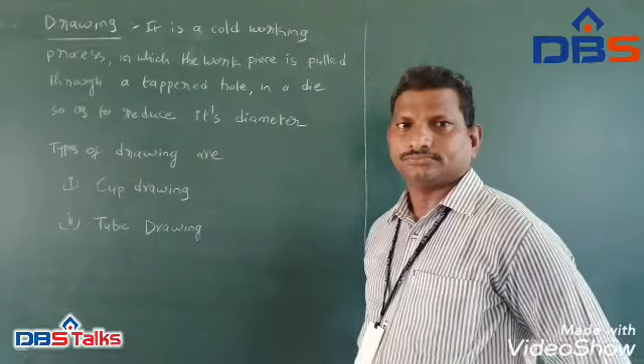Let us discuss the process drawing. Drawing is also one of the sheet metal working processes which we may do on sheet metals. So what is meant by drawing? It is a cold working process in which the workpiece is pulled through a die. This die will have one hole, and through this hole the workpiece is pulled so as to reduce its diameter.

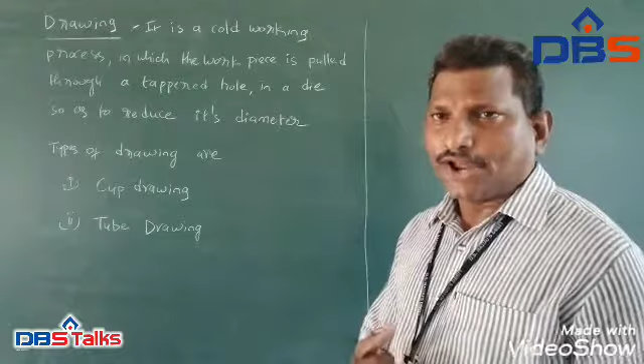Drawing is a cold working process. How can we say it's a cold working process? When we do the sheet metal work on the sheet at a temperature lesser than the recrystallization temperature, that process is called a cold working process. Here we are carrying out this drawing process at a temperature lesser than the recrystallization temperature. That is why we are calling it a cold working process.

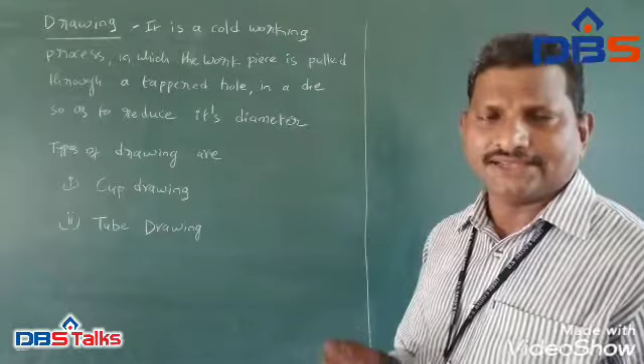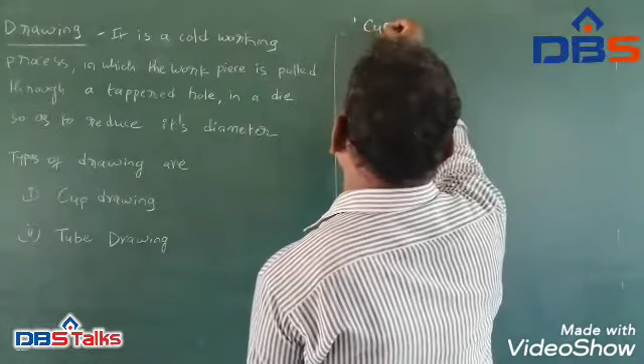So in this drawing process, what is the main aim? We have to produce devices like cups and tubes. If the drawing process is used to produce cups, it is called cup drawing. And if the drawing process is used to produce tubes, it is called tube drawing. Let us discuss the mechanism present in cup drawing. Cup drawing. In this cup drawing method, the devices we need are punch, die setup, and sheet metal.

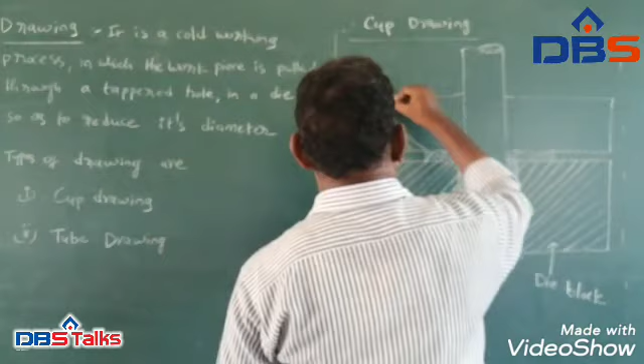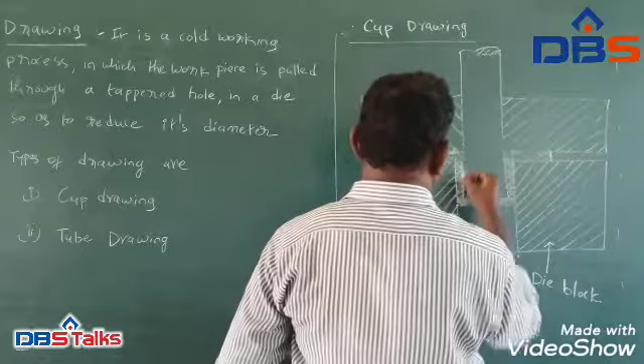We are drawing the hatching section of the die block. This is called the die block. And now we are drawing the hatching section of the punch hole. This is the sheet metal. Punch. Okay.

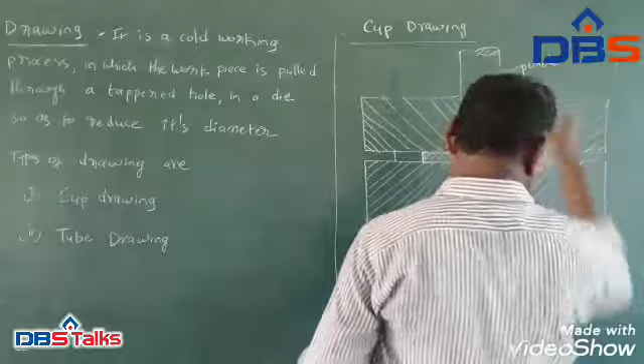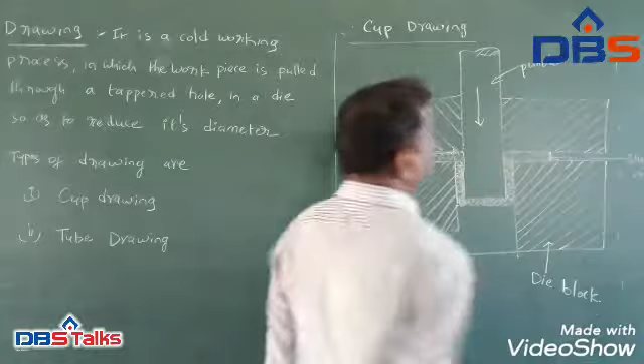You are seeing a schematic diagram for the cup drawing process. What are the devices which may be used in the cup drawing process? Die block, punch, and stock or sheet metal. See, what is the shape of this die hole? This is just like a cup. So before producing this cup, first we will place the flat sheet metal on this die block and put the punch holder upon it.

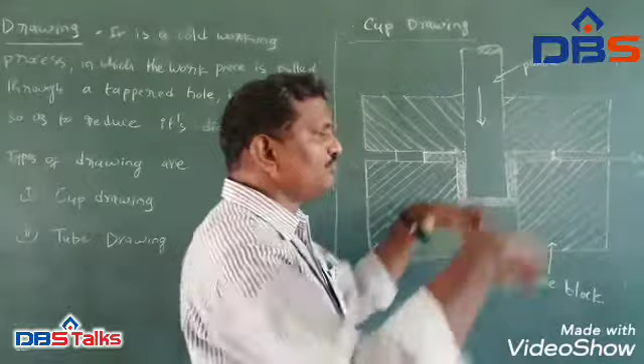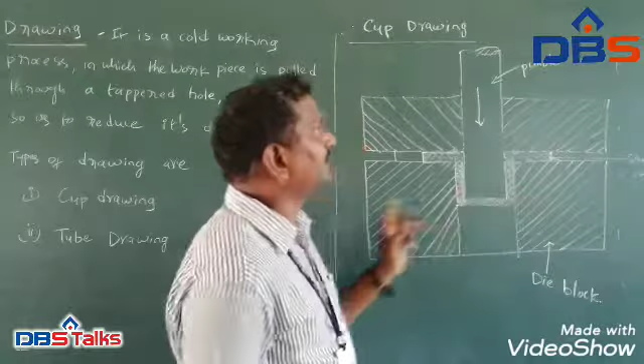Then we will allow the punch to fall down into the die block hole of required size. Because of the force acting upon the sheet metal, this flat sheet will turn into a cup-shaped object. After producing this cup, the punch will be moved up and we will collect the produced cup. By this, we produce the cups. Since the cup is produced by the method of drawing, we call it the cup drawing method.

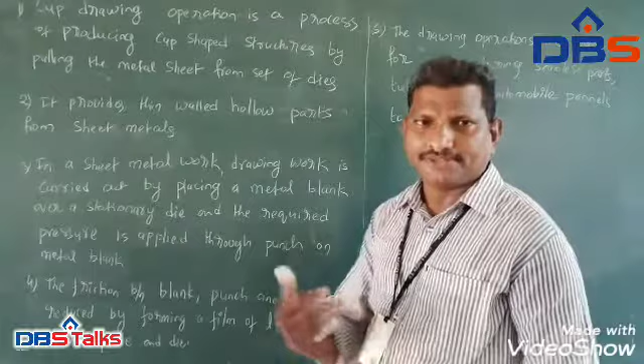Let us discuss the main points in the cup drawing process. The cup drawing operation is a process of producing a cup by using a die, punch and a blank. What is meant by blank? Blank is the input sheet or input material which is meant for producing the cups. This is taken from the sheet metal. So, what are the procedural steps involved in producing the cups?

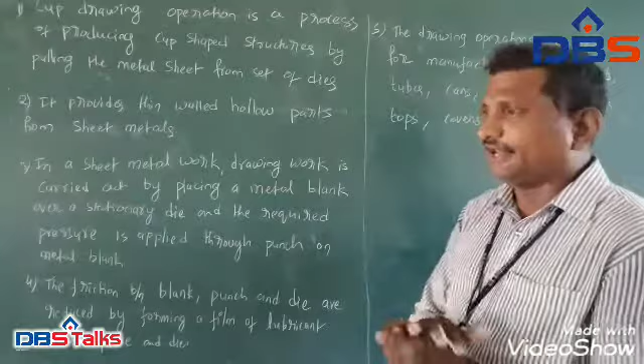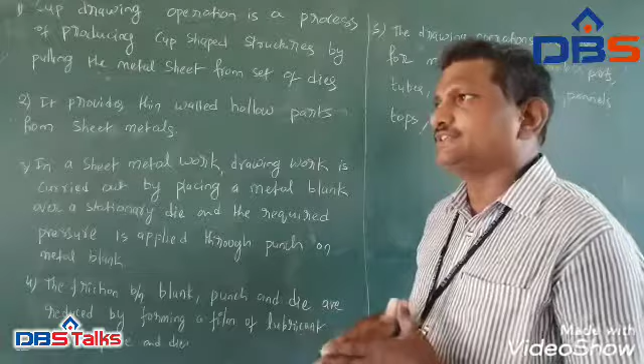First the input material or blank is placed between the stationary die and punch. The stationary die rests on the ground and the punch rests on the blank; there is a hole or cup-shaped cavity in the stationary die. Once the punch is allowed to fall on the blank, which passes through that hole, a pressure or force is exerted on the blank. Because of this force, a cup-shaped object is produced.

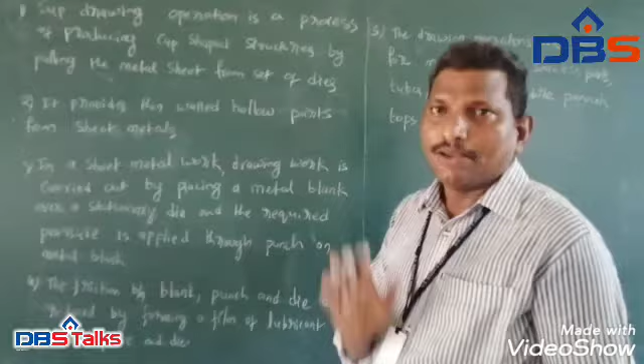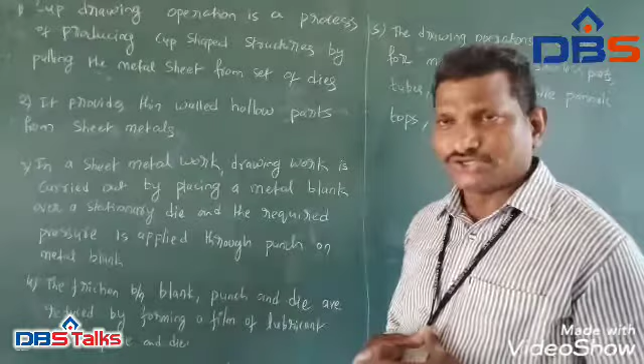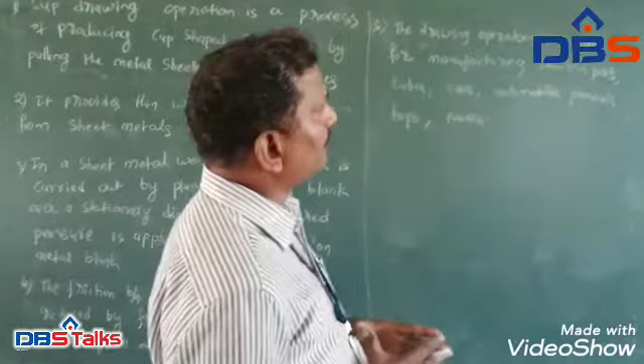In this mechanism, friction exists. So, to reduce the friction, we apply a thin lubricant film between the three contact surfaces. By using this cup drawing operation, we can produce thin-walled cups. Drawing operations are also used to produce seamless pots, seamless tubes, automobile covers, and automobile tops.

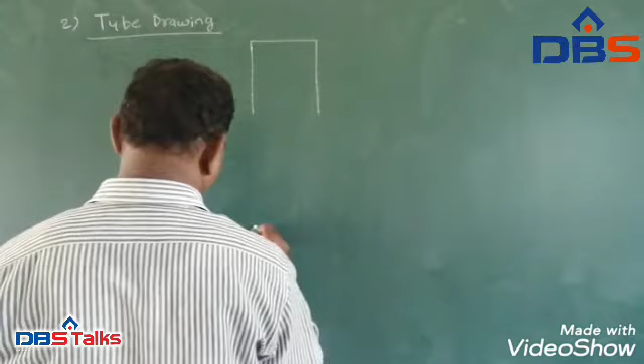Let us discuss the tube drawing process. Tube drawing. By seeing this title, we can understand this method is used to produce tubes by the drawing sheet metal work process. The devices we need are one vertical die with a hole.

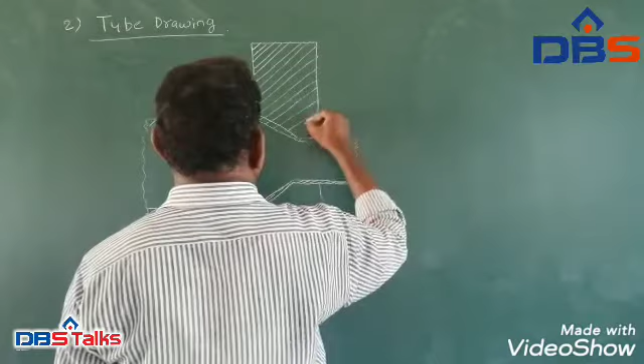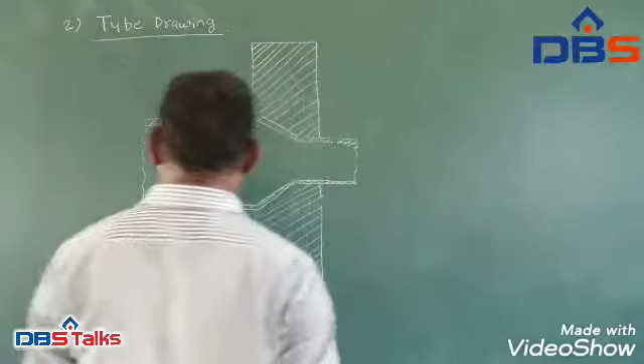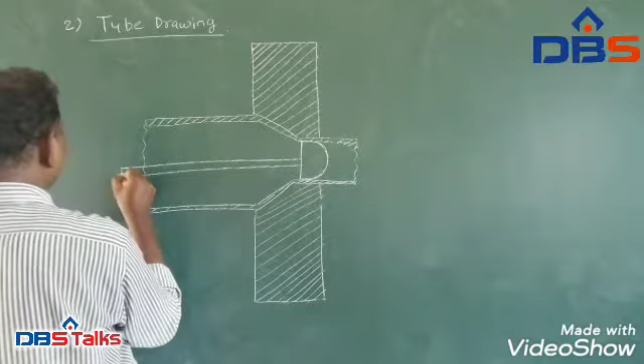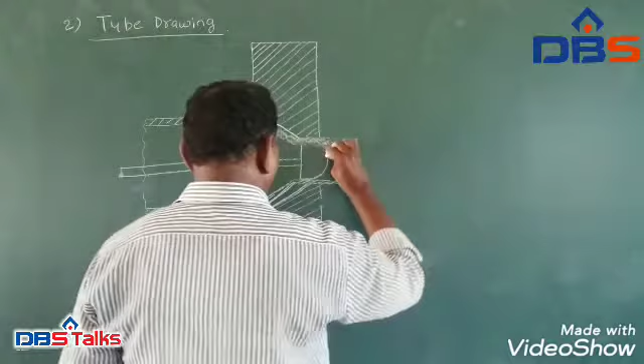We are drawing the hatching section of the vertical die, having a small opening of reduced diameter. Now I am drawing the mandrel. This mandrel has a diameter approximately equal to the required diameter of the produced tubes. Here there is a tapered section provided for smooth flow of the blank.

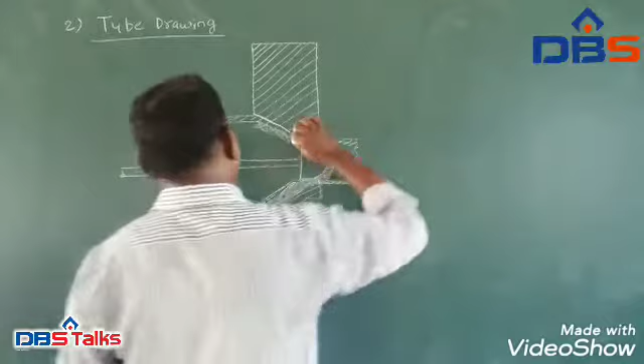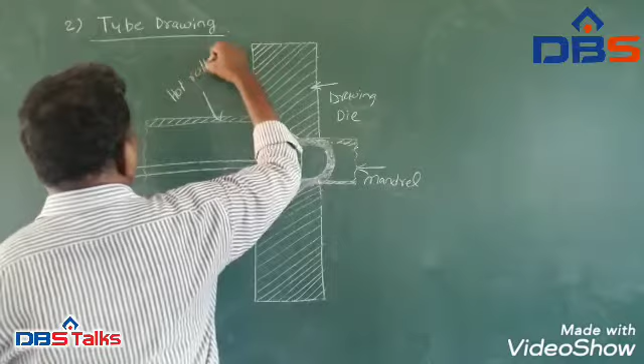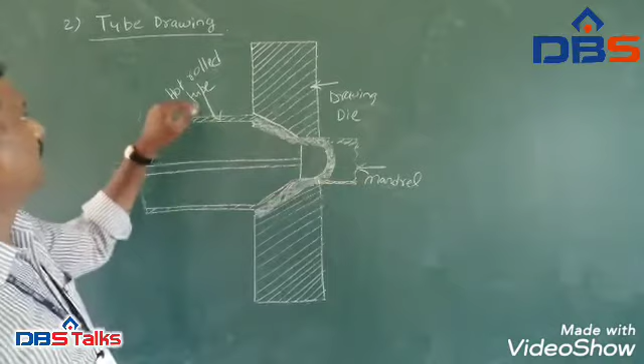This is the drawing die, this is the mandrel, and this is the hot rolled tube. You have seen a simple schematic diagram which represents the combination of drawing by mandrel and hot rolled tube, which is used to produce tubes.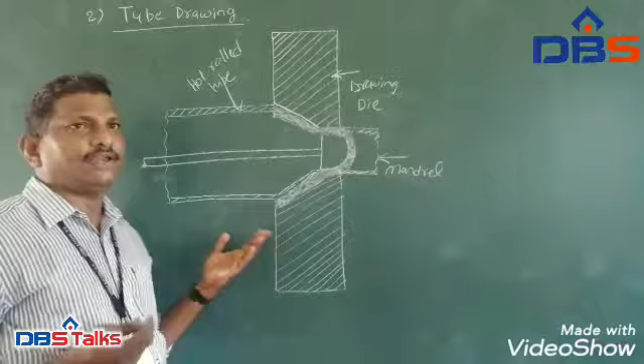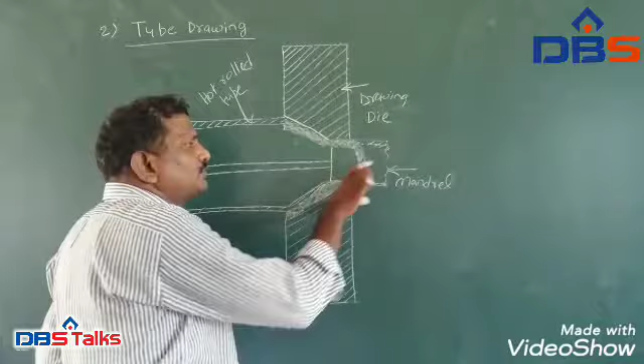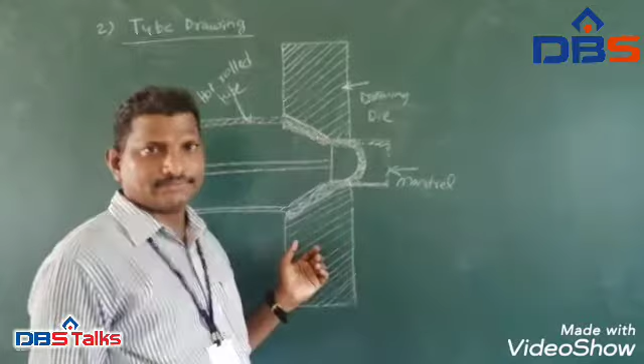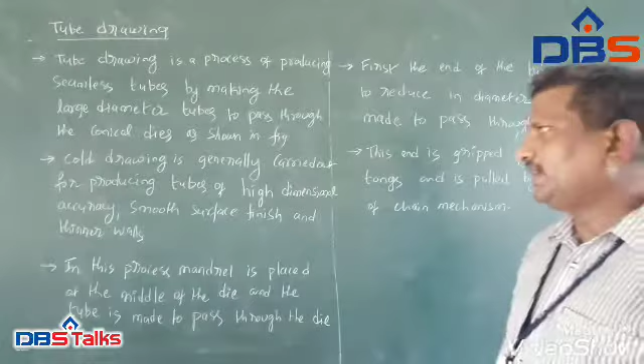Let us see the main points presented in the operation of tube drawing. Tube drawing is a process of producing seamless tubes by making the large diameter tubes pass through conical dies as shown in the figure. Cold drawing is generally carried out for producing tubes of high dimensional accuracy, smooth surface finish and thinner

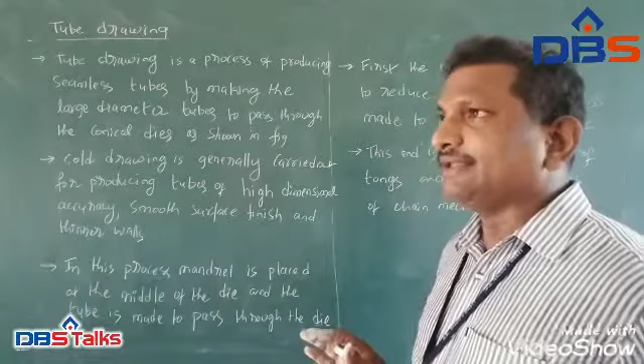walls. In this process, a mandrel is used which is placed at the middle of the die, and the tube whose diameter is to be reduced is made to pass through the die. The tube is heated and its temperature is raised to the recrystallization temperature, and this tube is made to pass through the die.

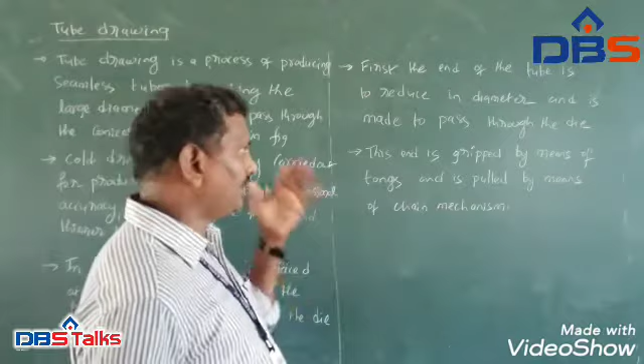The end of the tube which is to be reduced in diameter is made to pass through the die. The end is gripped with the tongs, and then it will be pulled by using the chain mechanism. One more method presented in the drawing operation is deep drawing.

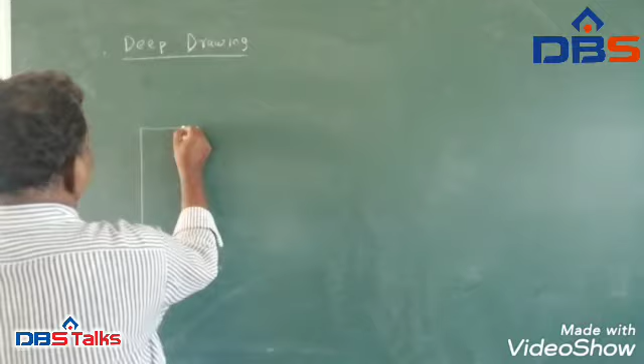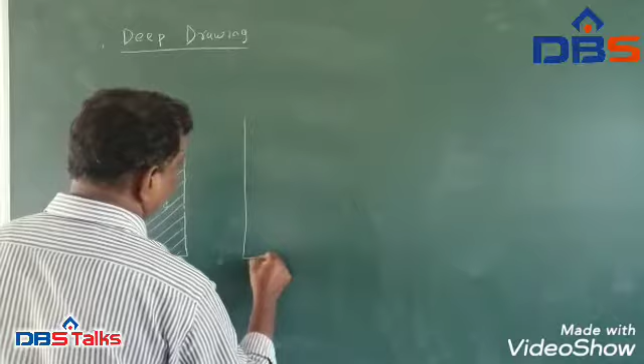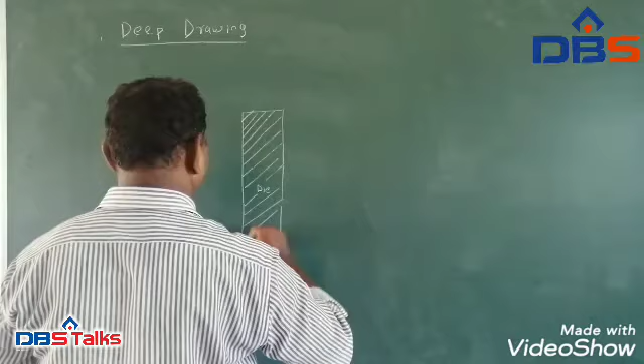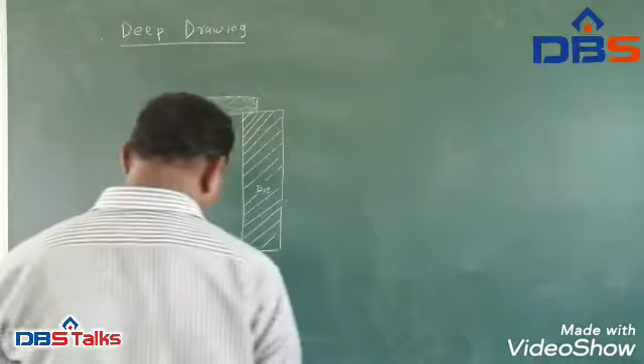Now, draw the sketches of die blocks. One more die block. We are drawing an object which represents the blank or sheet metal from which we are producing the cup. To produce cups we need one punch. These are the stationary dies. So this first figure shows before operation.

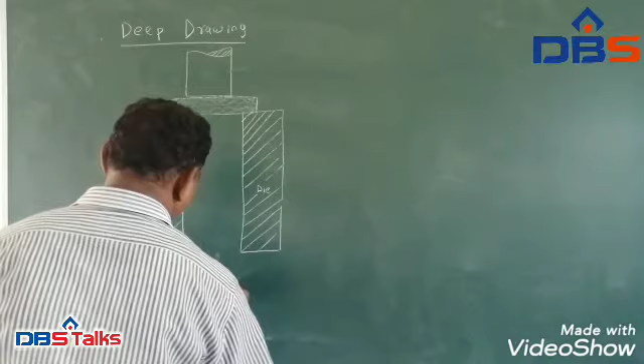Figure B. Now we are drawing the schematic diagram which represents the deep drawing process, which is used to produce cups of larger depths.

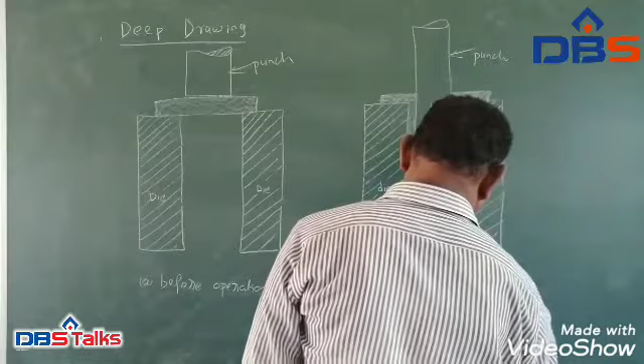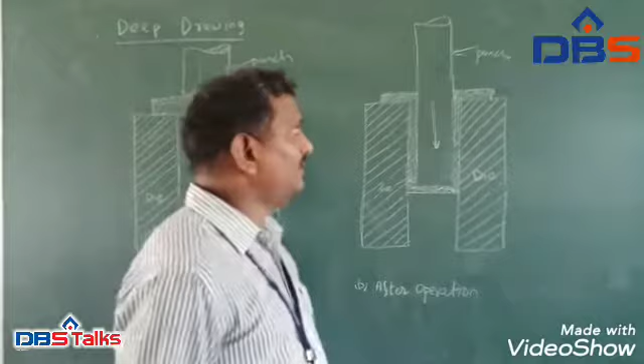Case B indicates after operation. In figure A, simply a metal sheet or blank is placed on the two stationary dies and we attach one punch. To produce the cups by this deep drawing method, the punch is made to press or exert a certain force on the blank.

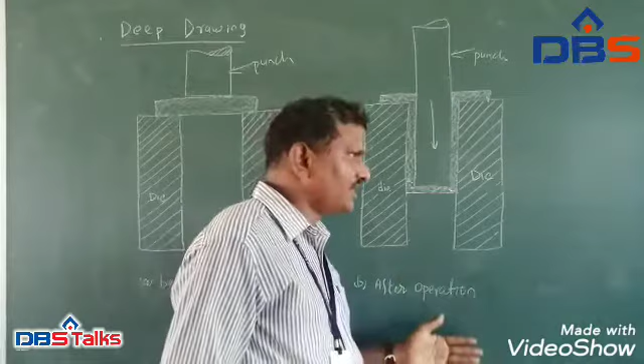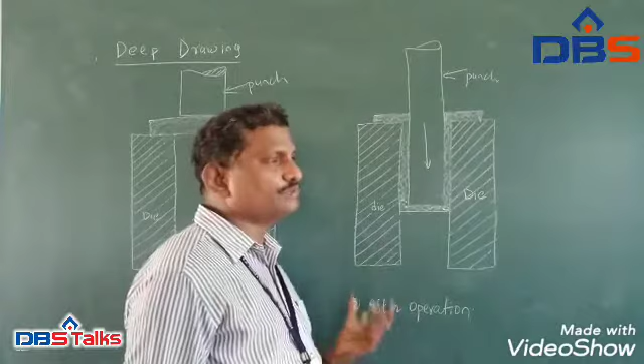In between these two dies there is a big cavity which is equal to the outer diameter of the cup. So as the punch continuously presses and exerts force in the downward direction, a thin walled cup with the required depth will be produced. By using this deep drawing method, we can produce milk cans, washing machine tubs and other engineering components.

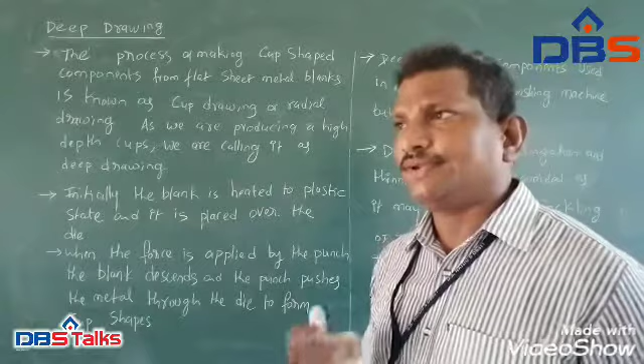Let us discuss the important steps in deep drawing. The process of making cup-shaped components from flat sheet metal blanks is known as cup drawing or radial drawing. This method is also called deep drawing, because we are making cups with higher depths. Initially, the blank is heated to plastic state and is placed over the dies.

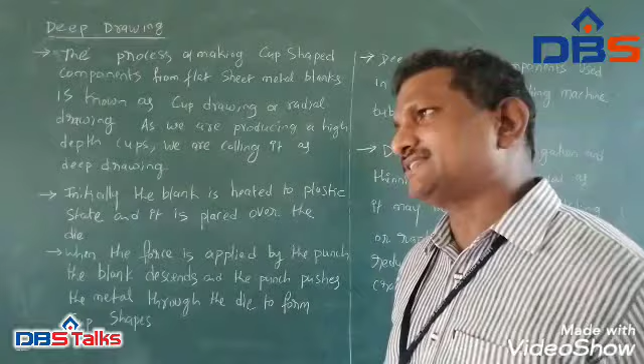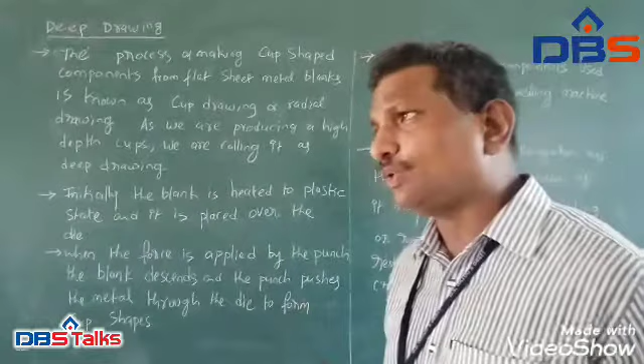What is the need to heat the blank to plastic state? Whatever operations we carry out must produce a permanent deformation. There should be no spring back effect. That is why we heat this metal to the plastic deformation state. Also, when we apply heat, recrystallization takes place: disintegration of the old grains and simultaneous formation of a new grain structure with reduction in size.

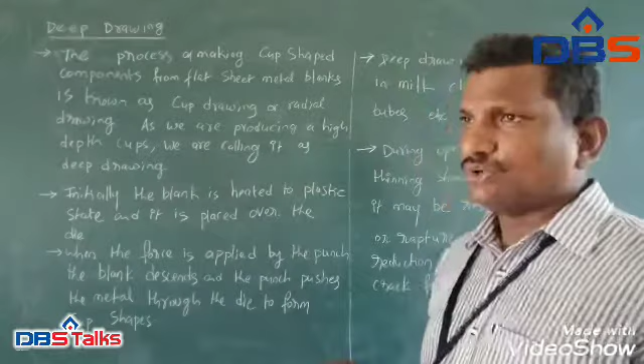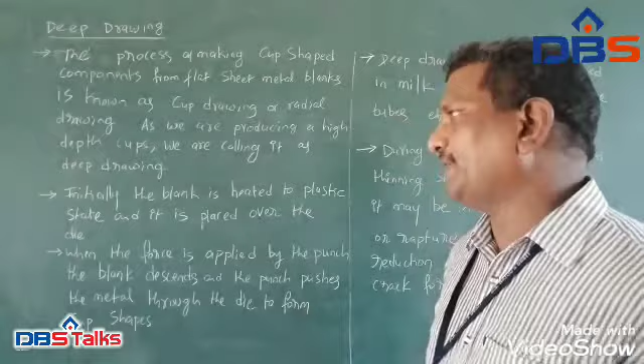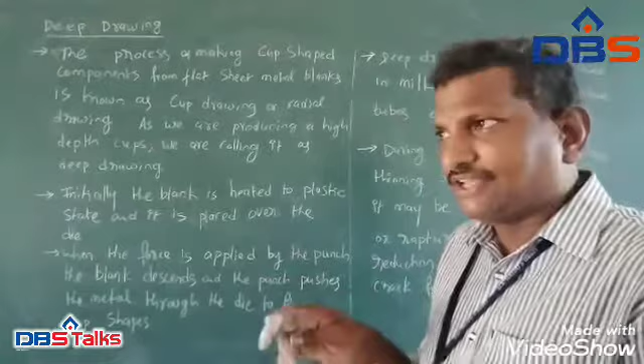So before applying pressure or force on the metal sheets or blanks, we have to heat them to a certain temperature. After heating, the blank has to be placed on the dies. Then the force is applied through the punch. Once we apply the force through the punch on the blank, the metal is forced to flow through the cavity or hole in the die. So as the punch descends, the cups will be formed.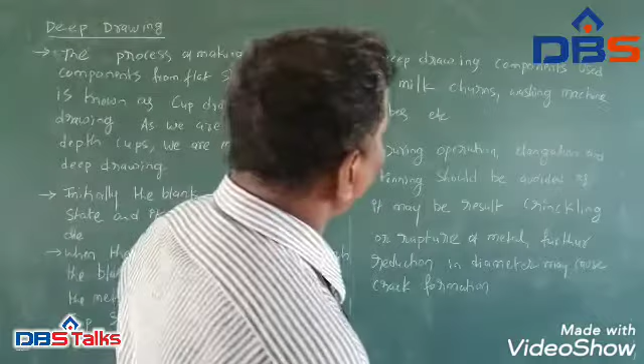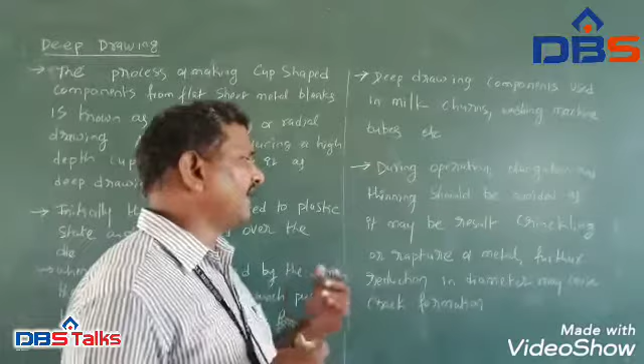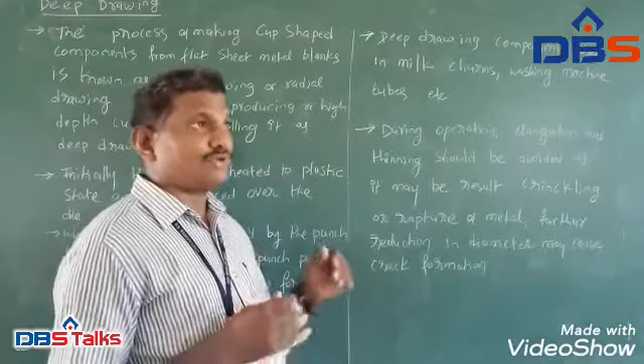Deep drawn components are used in milk churns and washing machine tubs. During operation, elongation and thinning should be avoided, because if the blank continuously goes on elongating and thinning, it may result in crinkling and rupture of the metal, and further reduction in diameter may cause crack formation. Any cracks on the metal will cause defects on the produced components. So we have to avoid such crack formation.

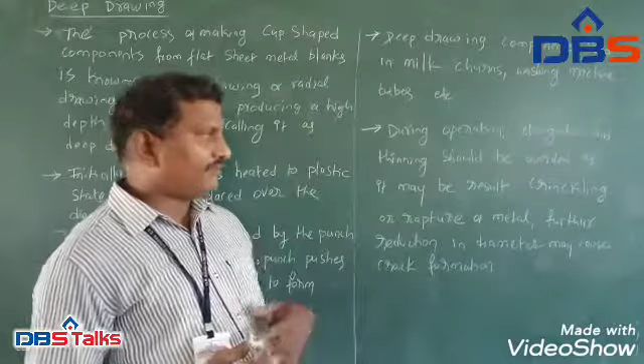So during the operation, the elongation and thinning should be within the permissible limit to avoid material waste, operation waste and pressure waste. The produced component has to be ready for use. If any cracks are present, they will be found in quality control.

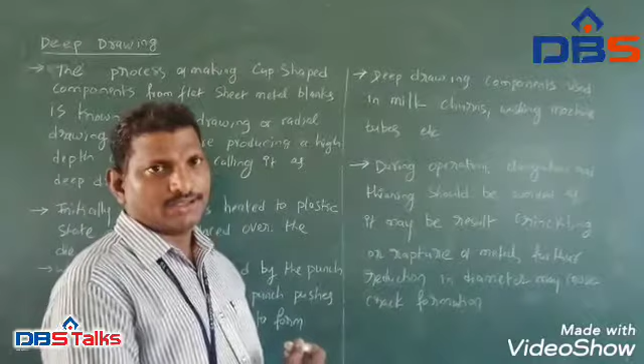There is another method available within drawing, known as redrawing. Redrawing is a drawing method which is used to reduce the diameter of an already drawn cup. Using the appropriate setups, we can reduce the diameters of the drawn material. Whatever the cups, they must have the required diameter and shape.

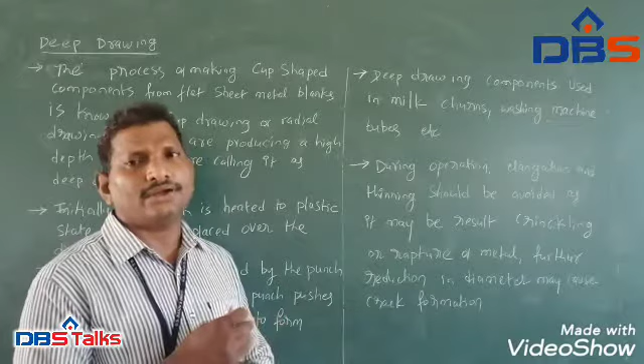Tolerances, precision and accuracy. Once the product has the appropriate required diameter, accuracy, surface finish and precision, we can use that cup for any other purpose. If the diameter is slightly higher than the required diameter, then we may go for the redrawing method to reduce the diameter.